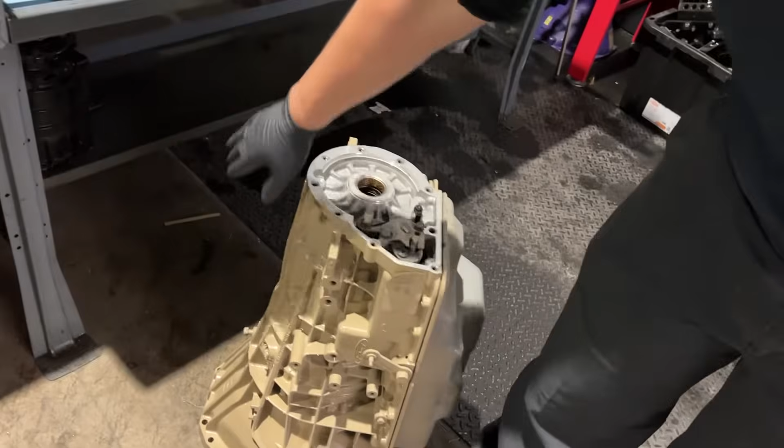So we're back at work. We're going to do some work today. We're back on the 6.0 project. We're going to go through and rebuild this transmission. I already got it torn down. As you guys can see, got the case cleaned up, got it painted, looking nice, matched the desert tan that we did on the motor.

But yeah, the first thing we're gonna do is we're gonna go ahead and get all these parts put in the parts washer. And guys, like I said, I already got it all torn down. Let me tell you guys, the best investment I think for this shop that I've made is this parts cleaner that I built, this little Christmas tree thing to hold all these parts.

Excuse the noise, we got Trevor over here working on a 6.0.

But yeah, guys, if you don't have one of those cleaners, I implore you to get one. They are literally the best investment. I think I paid 800 bucks for that thing off Facebook Marketplace like 4 years ago. So anyways, guys, first things first, we're gonna get all this in the parts washer, and then we'll come back and I'll show you the parts we're gonna use, and we'll get started.

So as you guys can see, this parts washer with this tree, I got everything to fit in here. So we'll just throw it in here for about 30 minutes to an hour, and these parts will pretty much come out looking brand new. So again, great investment, probably one of the best tools that I have purchased for the shop. Just that easy, and walk away.

All right, guys, got a little bit of liquid motivation here in a can.

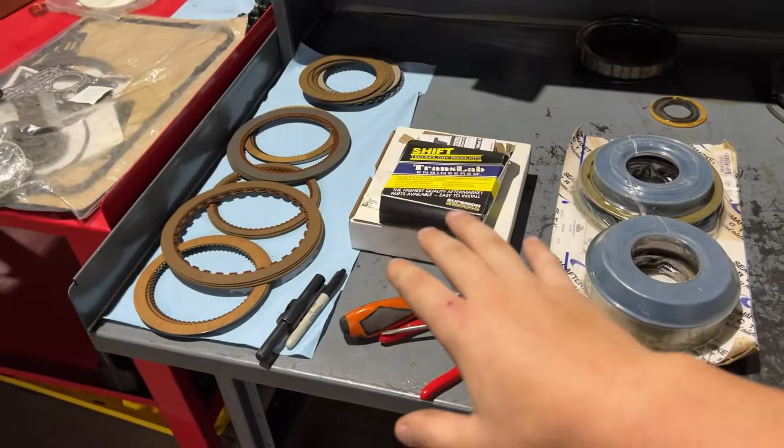Anyway, so here's the parts we're going to be working with on this transmission build. First off, if you guys remember, we did a transmission build before, a 5R110 on the channel. On that one, it was more of a performance build. So we did like GPZ clutches, billet input shaft, billet triple disc converter, the whole nine. This one, we're going for just more of a tow rig, nothing too crazy.

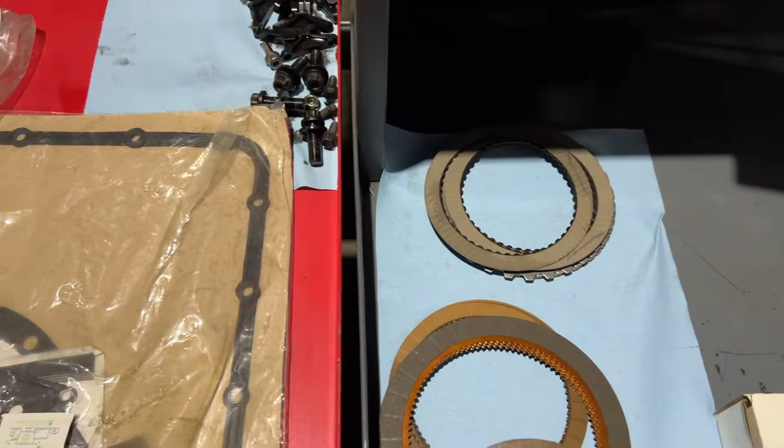So what we have here is an OEM clutch kit, Exedy clutch kit. All the steels really looked phenomenal on this transmission. So what we're gonna do is just kind of scuff them up, clean them back up, reuse them, save a few dollars there. But I did go ahead and purchase some GPZs for the directs, which are the clutches that are on in, I believe 3rd and 5th. I'll double check that. I may be thinking of Allison, but I'll double check that, and I'll let you guys know.

But anyway, those clutches, the directs, if you guys know anything about Fords and 5R110s, these are the most worn clutches. These are the ones that wear out the most. They're the hardest used ones in the transmission, arguably. So spent a couple extra dollars and got the GPZs for that. But anyway, like I said, the teardown, all the clutches that were in here actually didn't look half bad. So this trans was living a pretty healthy life. So I'm not worried about the OEM rebuild.

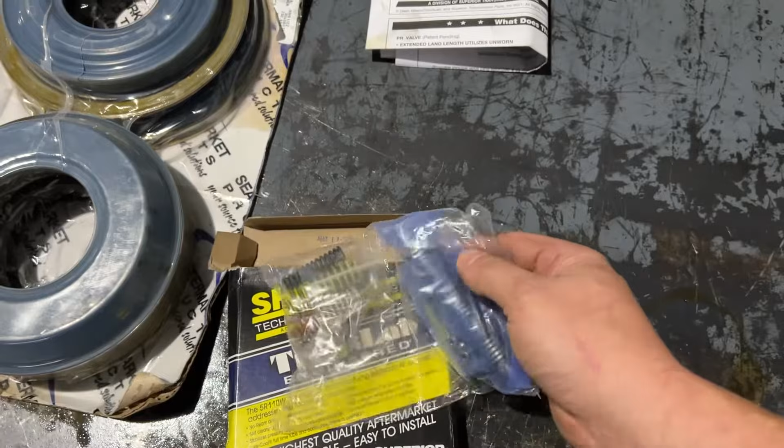But we are going to do some upgrades as far as the pump. I went ahead and got both the Superior kits for the 5R110. This one here is the pressure upgrade and the lube modifications that you want to do for these transmissions. We'll go over those as we get into them.

This kit here comes with some upgrades. Comes with a shim in here for tightening up the end play. Comes with a new direct bushing, an upgraded low reverse snap ring, and I forget what this snap ring is, some of this other stuff. Again, we'll get into it as we tear into it.

Superior makes a very well put together instruction sheet on their stuff, which is really nice. With a lot of things nowadays, nobody wants to put instructions on anything anymore.

But then, of course, we got a new set of pistons, bonded pistons. Now, these are the performance ones. They weren't a huge upgrade in cost. I think it was like 10-20 bucks more from just the regular OEM ones, so I went ahead and got them anyway. These are the same ones that we used on Gabriel's 5R, so I got no problem with them. I'm gonna go ahead and use them again.

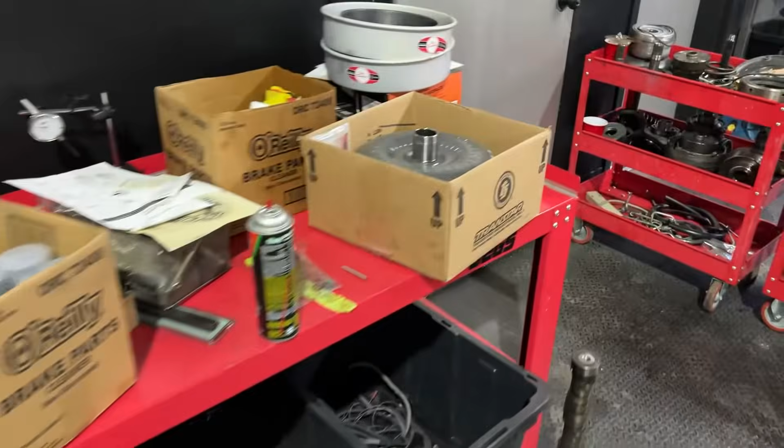And then over here we got the torque converter. My buddy Jesus over at TCR here in Vegas went ahead and rebuilt it. Stock cover, no billet cover, nothing like that. Again, because this transmission is going behind this truck, that's stock turbo, stock injectors, no tune. I intend this thing to just be like a good towing vehicle. You know, we're not going for a race truck. We got plenty of those. So the next owner, if they want to do whatever, that's on them, but at least we have a good foundation to start with.

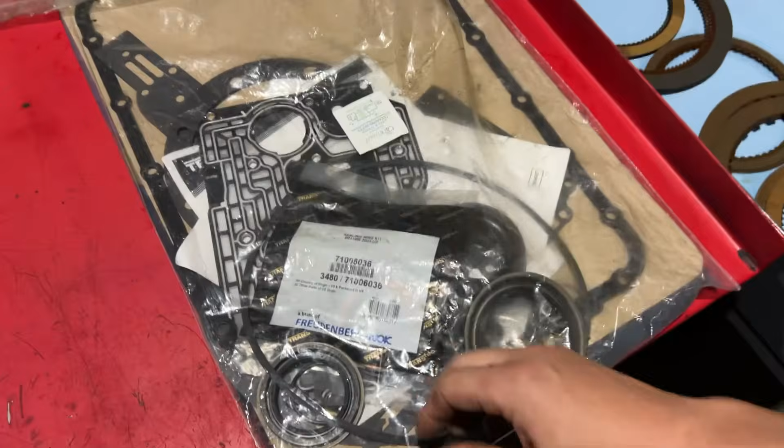And of course too, we have a full seal and gasket kit. Just a, what is it, TranStar, I believe. Of course, we're going to replace all the gaskets in here. I got the valve body, which is actually out of Gabriel's transmission, that we got to get cleaned up and reused for this.

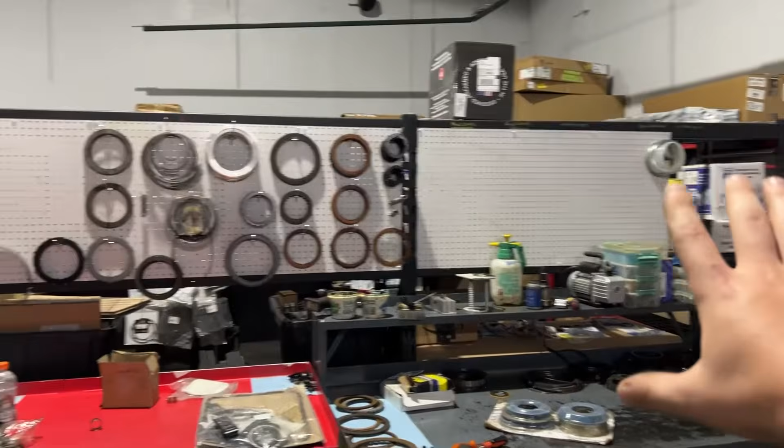And guys, real quick, I apologize if the lighting's kind of weird. I haven't had time to fully set up my room here. I only got the one light here, and we got the lights here, but I think what I'll do is get a couple more of these, add like 2-3 of them along here, maybe one here. You guys can see I started setting up some of my room. I got my pegboard. I just basically did some self tappers on the back of the shelves here that divide my room and the parts room. So slowly but surely we're getting everything kind of together. Moving a whole business like this and a whole shop, especially on such short notice, takes time.

So anyway, guys, we're just waiting on the parts to clean up. I'm gonna clean up a couple of these parts here, like I said, the steels and stuff, and we'll come back once we're going into assembly.

Now, when you're checking your steels to see if they're reusable, there's a couple things you're looking for. Main thing is you're looking to make sure that it's straight, right? I know it's kind of hard to see, but when you get a lot of heat put into them, they can kind of distort, and they'll get wavy. They'll actually look like this one here, which is supposed to look like this, but your steels are not supposed to look like that. So you're looking for that.

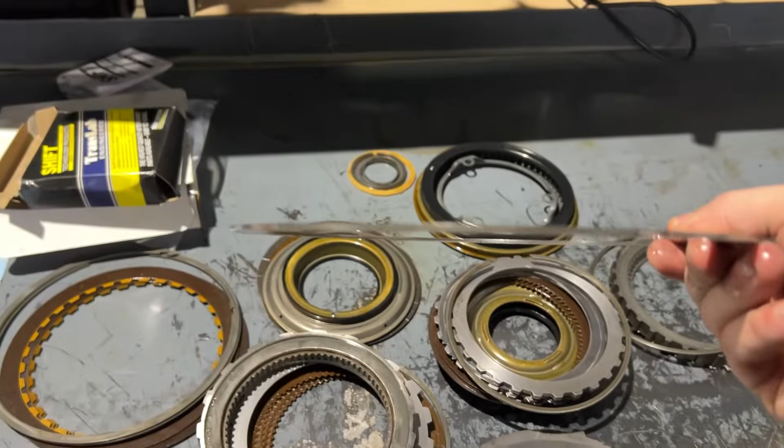You also want to make sure that your steels are flat all around, meaning like in the center here. Sometimes with the way the piston is, it'll push and you'll get like a cone effect going on with your steels and clutches. So you want to make sure that they're perfectly flat. That's the main thing with that.

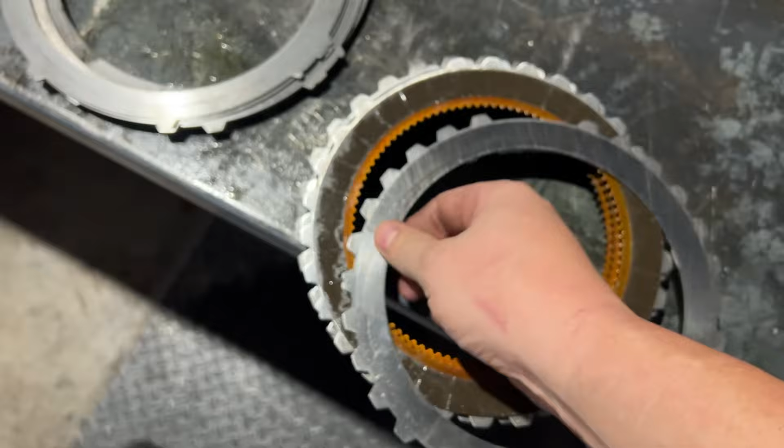And then as far as cleaning them up, all I'm using is a Scotch-Brite pad, and you guys can kind of see how this one is shiny, and then this one I just kind of scuffed up and dulled out a little bit. We're not trying to take off material, we're not doing any crazy machining, just kind of break down this shiny surface so that way the new clutches have a bit of a rougher surface to bite on. Something like this, where you guys can see it's more of a rougher machine finish instead of almost a polished finish after 200-something thousand miles of use.

But that's what I'm doing here, guys. That's a super simple thing. Good way to cut down costs on a budget build such as this one.

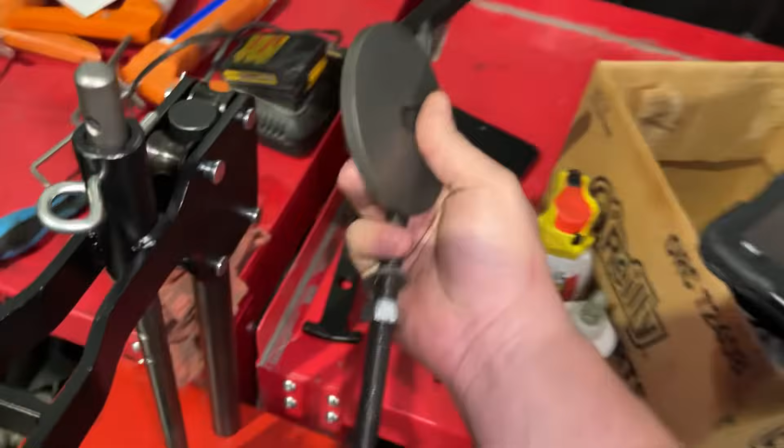All right, so while we wait on the rest of the parts to clean up, we're going to get the low reverse piston out. It is actually inside the transmission case. It's the only one. And to do that, we are gonna use our trusty $30 Amazon special piston chingadera, whatever you wanna call it.

And sorry about that noise, guys. And basically what we're gonna do is, all right, let's not drop the phone. Basically you got these arms. Of course, it's always weird doing stuff one-handed. Sorry, guys.

Come on. Woo! Get it.

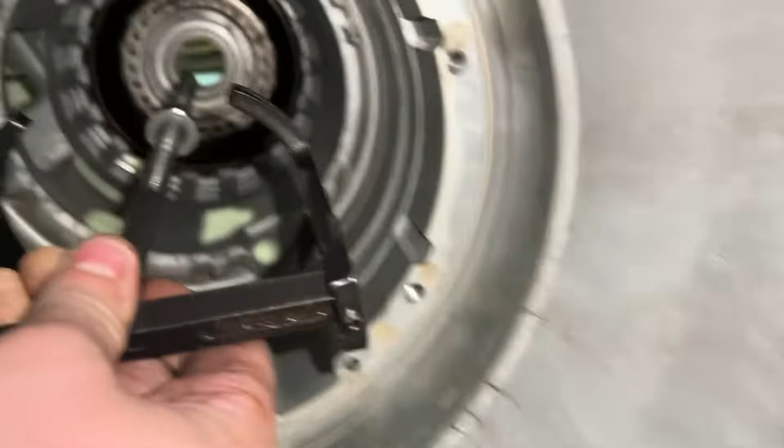Right. And what's cool about this tool versus the floor press is obviously I can't get the transmission on the floor press to make that happen. So this little tool just shoved down there. And on the other side, we got this piece that'll go here, right? Tighten it down and then push down on the spring like a regular press. Get the snap ring out, pull it out. And then of course we have the new one that we're gonna slam in.

Yes, sir. Huh? The low reverse piston.

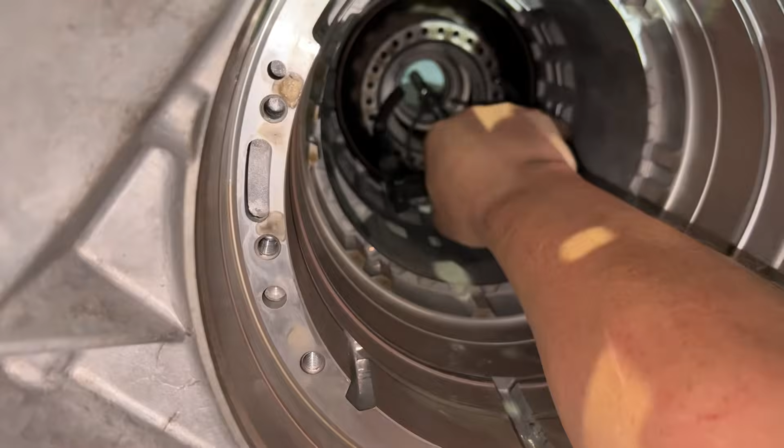All right, you guys seen, needed a little help, had to switch up the tools a little bit, but we got her done. Focus up. So, typical spring, and then I'm gonna come out. Gotta get some pliers. Cool. Now out with the old,

in with the new. So we're gonna go ahead, clean up down in there, just wipe it all, make it nice and clean, put some goop on, goop it up, and do the opposite of taking it out, putting it back in. Again, guys, much easier if you have the actual stand to hold the transmission vertical and whatnot, but hey, we're just getting her done anyway.

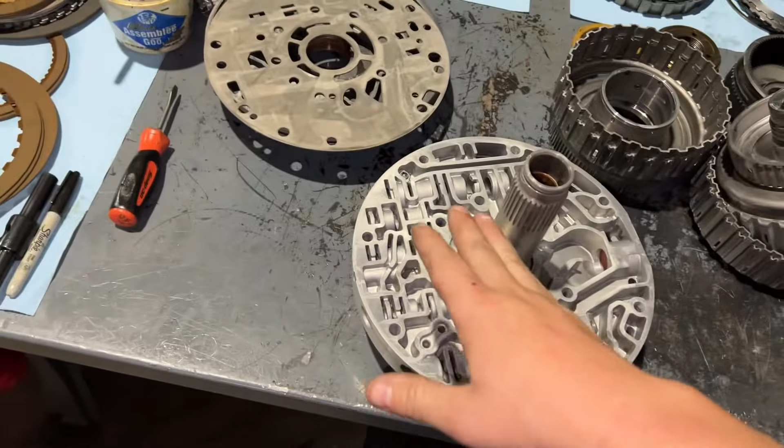So we got everything out, washed up, all the drums, everything like that. Now this is what I normally do before cleaning everything up, but figured it'd just be easier to do it now to show you guys. But what you want to do is there's a few things you're going to check on the hard parts. Generally, the hard parts are going to be fine, but obviously, if you have a failure, you want to look around, find out where you had the failure.

Now, on the 5R110s especially, one of the major issues they have is there's not enough grounding from the transmission to the battery, and what'll happen is it's basically trying to find ground, and apparently the way it finds ground, especially on these, is through the pump gears. And what'll happen is the pump gears will actually weld to the stator plate here.

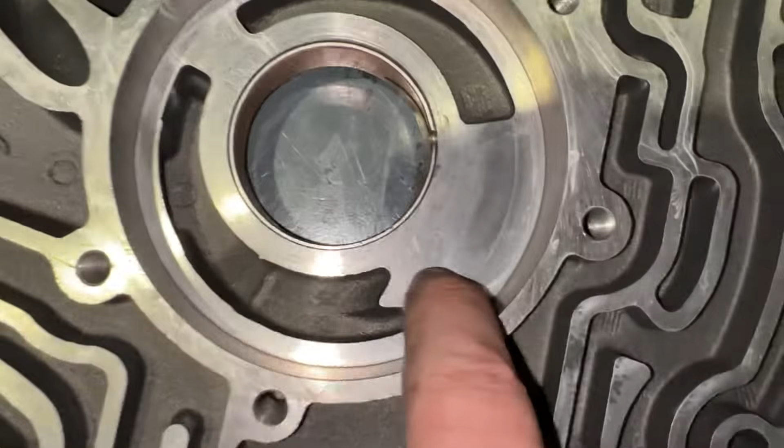So you want to look, this is where the pump gears ride. Look for any sort of wear on this. See how there, you can see where it's wearing, but it's nothing that's catching your fingertips, right? So that's good to go. Same thing, you just want to look around here, but mainly you want to look in here, and you can see there's just a little bit of scuffing, but nothing that's catching your finger, nothing crazy. So that pump cavity is good to go.

Check the pump gears out too. They're still in the wash. I dropped them, so I gotta wash them again. And then on the 5R110s especially, like any transmission, you want to check your stator bushing here and make sure there's no major wear. There's a little bit of a dark spot here, but you don't want to see any huge dark spots, especially on the stator bushing. This is where the converter rides. So basically the converter goes in like this, and this is where this rides.

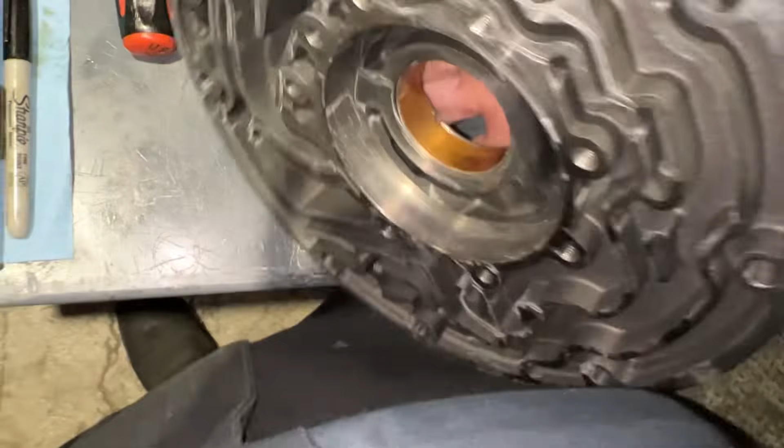So one issue you can have is an out of whack converter, right? Maybe a poorly built converter, or you could have a failed flex plate, something like that. Basically something that could put an excessive side load or stress on this bushing and wear it out. Sometimes you'll see it'll actually push it out and pancake it a bit.

Now, the issue on the 5R110s is that this bushing is not serviceable, at least without some special tooling. Basically, this bushing, it's kind of hard to see, but they press it in and then they finish hone it, because this hole, I guess, is not perfectly centered. I don't know, Ford, the way they do things is weird, but basically if this bushing's bad, you're just gonna wanna go ahead and replace this whole stator housing. You can't just service the bushing like you can on a 4R70, a 6R80, whatever else, like a normal transmission.

But anyway, guys, also on this transmission, like any transmission, you want to check all your bushings. All your drums are going to have bushings. Now on this unit, again, because we're on a little bit of a budget, I chose not to replace all the bushings.

So the only bushing we are replacing for sure is the direct bushing. This is the direct drum, and that's going to be with this Superior one-piece bushing with the special coating and all that, yada yada. We'll get to that here in a minute. But otherwise, all the bushings are fine. And again, it's the same thing as that bushing. You're just looking for any sort of pancaking, any sort of scratches or gouges, things like that.

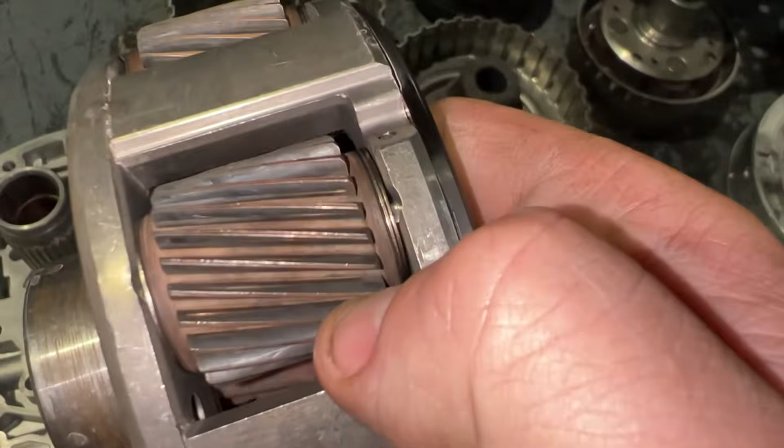Moving on, your gears, you're gonna look for any sort of major pitting. See how there's a little bit of light pitting there, but nothing super crazy. You don't want to see any pitting down in the valley there. And just make sure it spins freely. Kind of check your end play here. If you look in the ATSG book, which you better have if you're going to be building transmissions, and each book is specific to each transmission, there's going to be a spec for how much end play should be in all these gears, so you want to check that out.

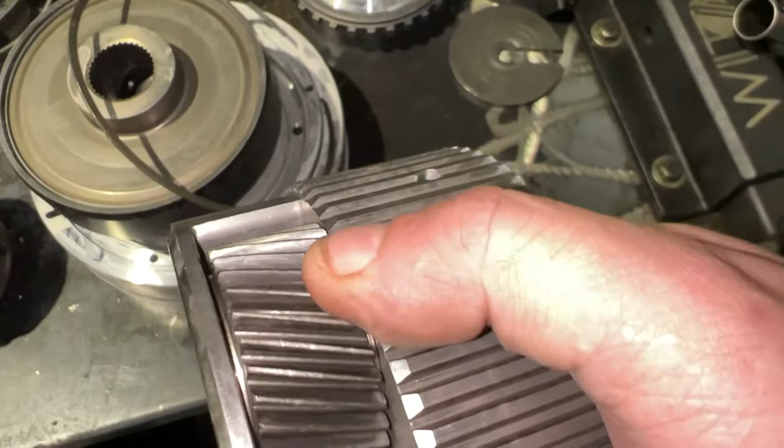Again, guys, I already went through this. This one, you know, not looking the best in the West, right? You can see a little bit of pitting on some of these gears, just starting basically. But being that this one is a stock power unit, I'm not too worried. If we were building a big horsepower unit, maybe we would replace those gears, swap them out for a unit like this. But otherwise, I'm not too worried.

So again, guys, you're just kind of looking at things like that. Same thing on these gears. Look for any sort of obviously bent gears, chipped gears, things like that, but pitting's going to be more likely. And then your play, because the bearings in here are non-serviceable. So anyway, like I said, we went through that already. Now I think we're going to start with the pump. We'll get the pump put together and get it off to the side, just because there's a whole bunch of pieces that we can put together and get it out of the way.

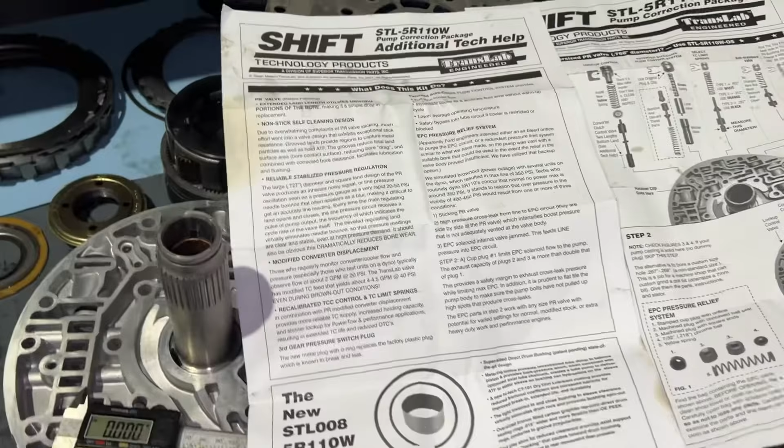All right, so the Superior pump kit covers a few major things. One of the biggest things for me, at least, and especially anybody running these transmissions in a hotter climate, is the full-time cooler flow modification. Basically, these pumps stock, they don't let fluid out into the cooler until a certain temperature. And here, when you're running these in a hot temperature, you're running them towing, Vegas, it gets up to 115 degrees in the summertime.

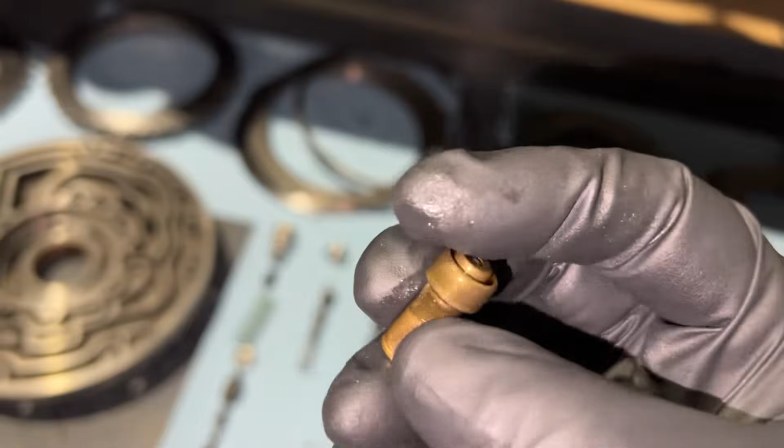We don't want that. So one thing we're doing is we're replacing the OEM setup, where basically this is a thermostat kind of deal, from what I understand. Replacing that with just their pieces here. You guys can see we're gonna get rid of all this crap and put their crap in. But yeah, that's one of the major things that we're doing.

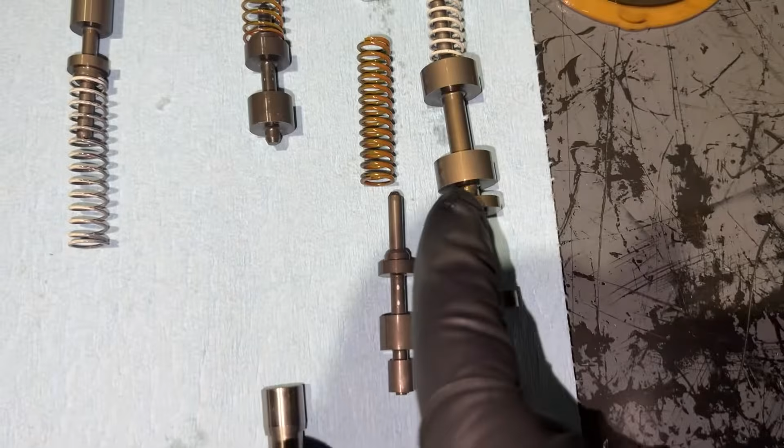Other than that, you can see here, this is the new pressure regulating valve. Here's the old one. One of the issues that's common in here, these like to seize up and stick. You'll get variable pressures where you have too high a pressure, too low a pressure, things like that. Not good. This one has kind of got a ribbing going, and of course it's got a special polish or coating, and it's like a super machine fit. But these ribs, even if some trash gets in here, the idea is that it'll go into the valleys and still allow this valve to move around, because you don't want too high of a pressure when you don't want it, and vice versa, too low.

Other than that, it's going to modify some of your converter lockup deal. Basically just upping the pressures for the converter, changing when it locks up, things like that. But anyway, this is all the old stuff I got laid out, and we're gonna replace some of it with the new stuff that comes in here.

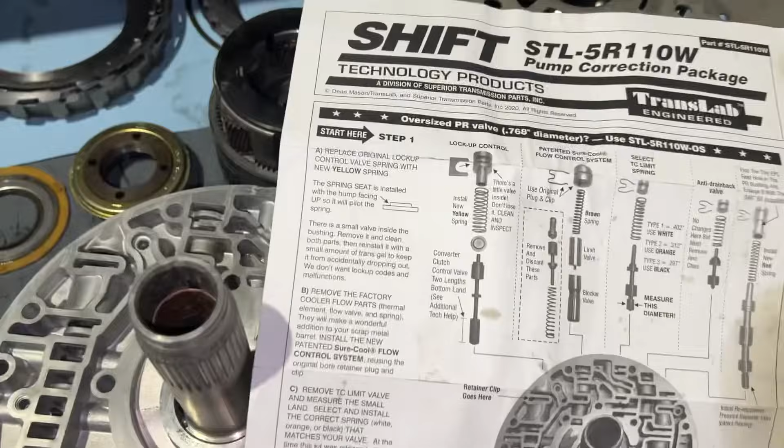So one of the first things we're gonna do, super easy, is in the lockup control, we're gonna just replace the green spring here with their new yellow spring. So we get rid of that, put that there. One thing to note is this valve, or this plug, whatever you wanna call it, at the end, has this little valve in it. It goes in here. Come on, focus up. Make sure that stays in there.

Easy to lose. I almost just dropped it and lost it myself.

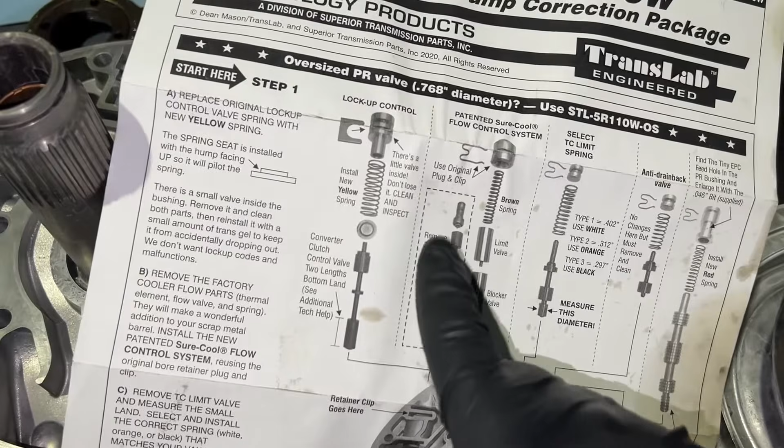Now moving on, we'll go ahead and start with the flow control setup. And as I was saying, this whole deal here, basically they're saying you're gonna get rid of all the spring, the valve, and this little thermal element thing. So we'll go ahead and do that. Let's put that over there for now.

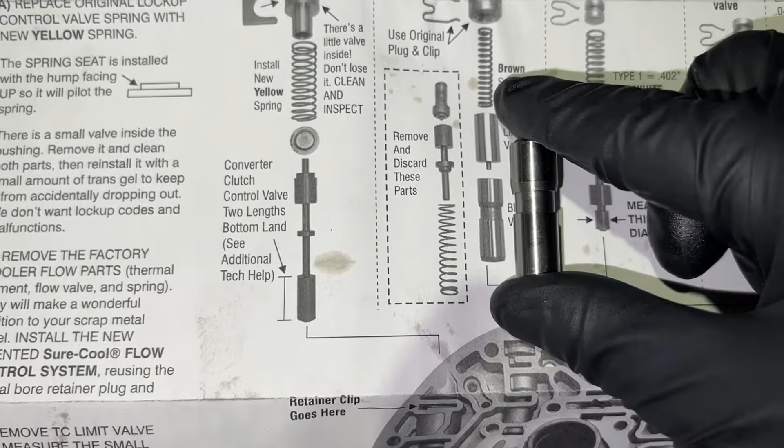And we're gonna replace it with the brown spring, the limit valve, and the blocker valve here, which is basically this deal here. This is gonna go, again guys, the instructions are phenomenal, just kind of follow them, super easy. Match up orientation, put that there. Then we're gonna look for the brown spring. That looks pretty brown to me. And that fits nicely in there.

Come on, focus up. Get your life together.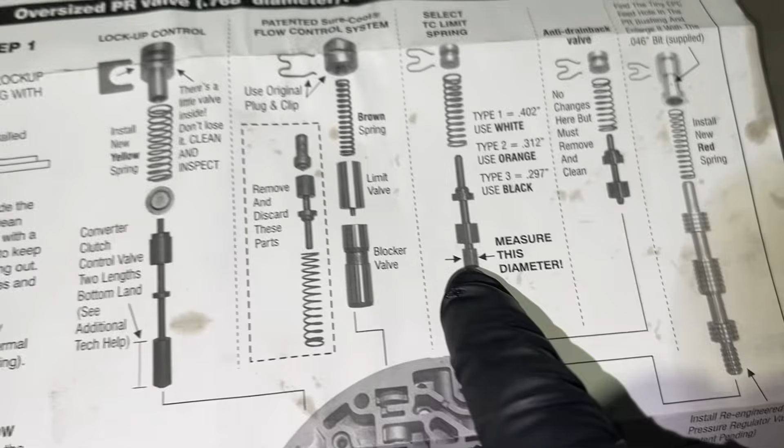Cool. That's done. Now we can play around with the converter valve. Now you can see here, there's actually 3 different springs that come in this kit for the converter valve. We got a white, orange, and black. And what they want you to do is measure this part, and there's 3 different sizes: 402 thou, 312 thou, and 297. So get your handy dandy measuring device.

Come on, can I do this? So we got the 297 thou, which means we're gonna use the black spring. So we're gonna use this one here. All right, we'll put that. And now that's done. Anti-drain back, basically leave that alone. That stays the same. Now we'll move on to the pressure regulating.

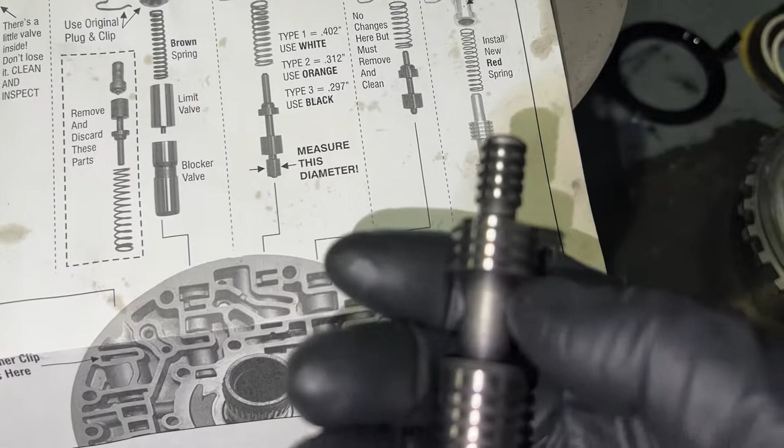This one, again, pretty easy. We're gonna replace the spring with the red one that comes in the kit, definitely that one. We can go ahead and ditch this whole deal here. That'll go there. And then obviously, pretty simple, the ribbed end. See, there's 2 ends, there's a smooth and the ribbed. Ribbed is gonna go into the stator.

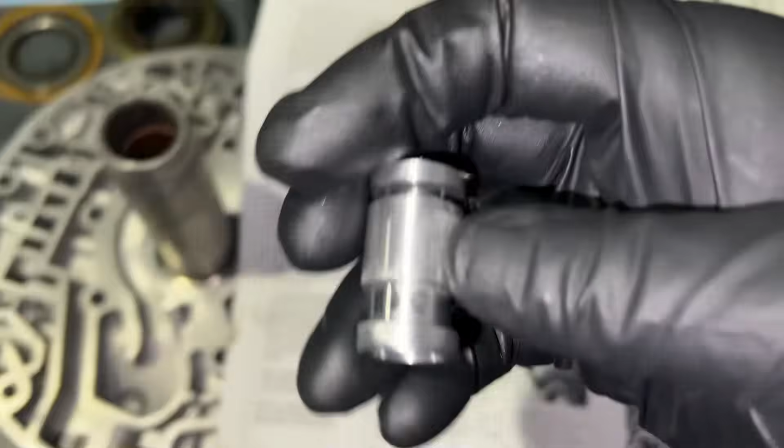And then the only other thing we got to do is there's a drill bit. We're going to go ahead and drill out the little lube orifice here. Where can you see it? So pretty simple, little drill, little hole, make hole larger, boom, that's done. So I'll do that off camera here in a minute.

And then moving on, we have the little plugs that we're going to replace here. So some stators are actually different, especially for different years. I think it shows it in the other sheet, but this one we're gonna go ahead and follow the instructions because we have this hole here and we have this little ball and seat deal here.

Basically the whole idea here is to open this up, clean it out, make sure there's no trash in there, and replace it with the new stuff. And then this hole here we're gonna go ahead and block off with this plug. So I'm gonna go ahead and get that knocked out and come back here shortly.

We got the pump case put together, the pump half, stator housing, whatever you wanna call it, all put together with all the new Superior upgrades. We got our EPC plug here. We got the other plug they provide here. And then of course all the new valves, new springs.

Now, time to assemble. One thing to note with the gears, you got the pump gears here. See how there's a flat side, and then there's this side with the bevel, and then the beveled pump gear that goes onto the converter. You want to make sure that's facing out on the pump. That way when you go to slip the converter in, you're gonna have a bad time if you're trying to do it here. This way, this will kind of guide the converter in.

And then of course you got a dot here and then a dot on this side. So just kind of keep those two together. We'll put them together like this, and then they'll go in dot facing up. Obviously what we're gonna do is lube this up with some green trans gel. That way when it fires up, it is ready to go. We'll put some lube on the bushing too.

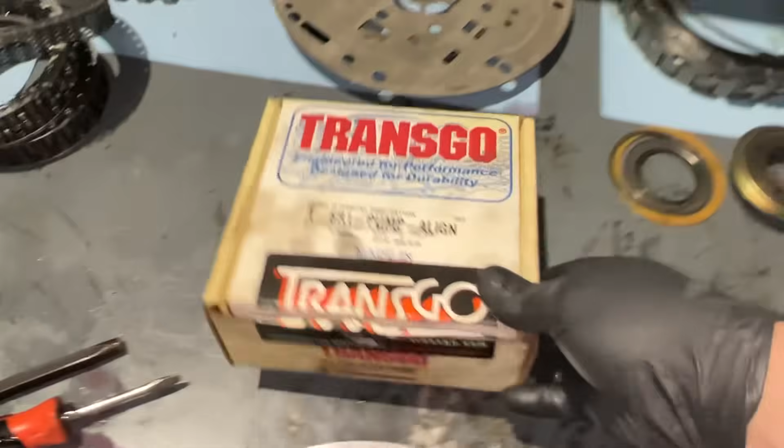Here is where you're gonna need a special tool. So it's this tool here, a pump alignment tool from Transgo. And I believe it comes with this. Either that or you need this. It's a pump tool. You guys will see how it goes together once we get into it.

But right now, real quick, I'm just gonna go ahead and lube up these gears, get them stuffed in here. Again, the reason why you lube them up is, one, you don't want metal on metal dry. Two, the trans gel will help act as a suction to get the pump going, so that way it'll get fluid coming in quick. I'm gonna go ahead and do that, and then I'll get you set up on the tripod, and we'll get this pump half put together.

All right, so for the alignment tool, basically you got these two bushings. They're just for different size stator bushings here. And then you got these two little roll pins, and then the clamp that'll go around the outside.

So basically we got the pump in, a little bit of trans gel on it, and now we'll get our stator plate put on, kind of line it up with these holes, and then we'll go ahead, kind of hold it, flip it over, do this number, then again do the same here. Where are those three holes at? Get it lined up here.

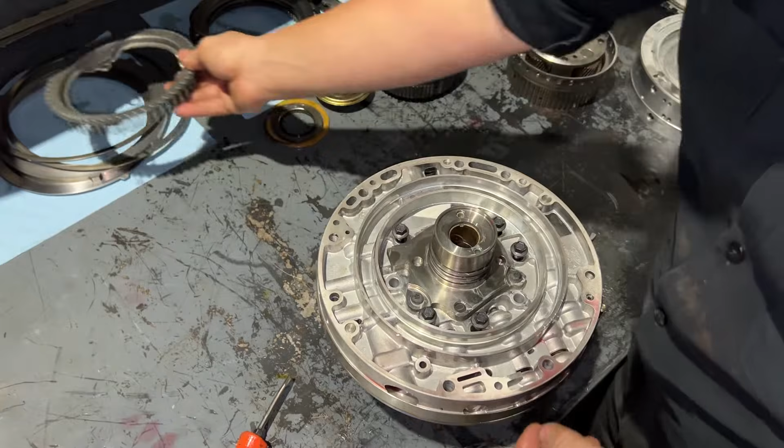All right, so these 10mm bolts will get torqued down to 23 foot-pounds. Do it in a star pattern, of course. Now we can go ahead and take out our alignment tools. Start with the clamp. Come on. There we go. Come on.

And now we'll just install our front seal, our piston, and our apply spring or our return spring, and the pump will be done. Quick tip about any sort of seals like these, see how they have that spring in there and you got to pound them in. I always like to take a little bit of trans gel goop, put a little behind there like that, just so that way when you're pounding it in... it's rare, but I've had it happen where you pound it in, that spring pops out, and now you lost your tension of the seal.

So a little bit of trans gel, pack it in there. We'll fix that, no problem. You guys can see I got the overdrive piston and the return spring installed. This little, I don't know what it's called, spacer or shim or bushing, bearing, whatever, installed. And then of course our coast clutch seals are all installed. Again, same thing, the scarf cut, you can see how they still want to come out. I'll apply a little more before it's time for assembly and I stab everything in.

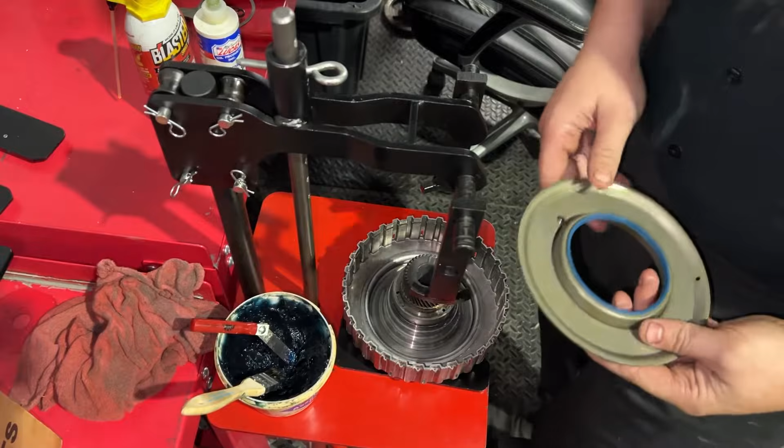Then of course coast clutch bearing. Pump assembly is all done. Now we can move on to the drums. All right, so I'll show you guys how to put in the apply piston on the coast clutch hub, and then it's pretty much the same for all the other drums, with the exception of I believe the forward and the directs. They have two pistons with a spring in the middle, so you just got to keep an eye out for that. But otherwise, this foot bench works great.

That other tool that I showed you with the low reverse spring works just as great too. This is just a little easier because you don't have to hold it and everything like that. But if you're only doing 1 or 2 transmissions every once in a while and you don't want to spend $400 or $500 on this tool, that little $30 Amazon tool works just great for what it does. So a little bit of lube on the piston, a little bit of lube in the drum. Of course there's a limit, but for the most part, lube is your friend when assembling transmission.

Just kind of walk it in, get it seated in there. Boom, good to go. Now we have our return spring, goes like that. Now we just set up the tool.

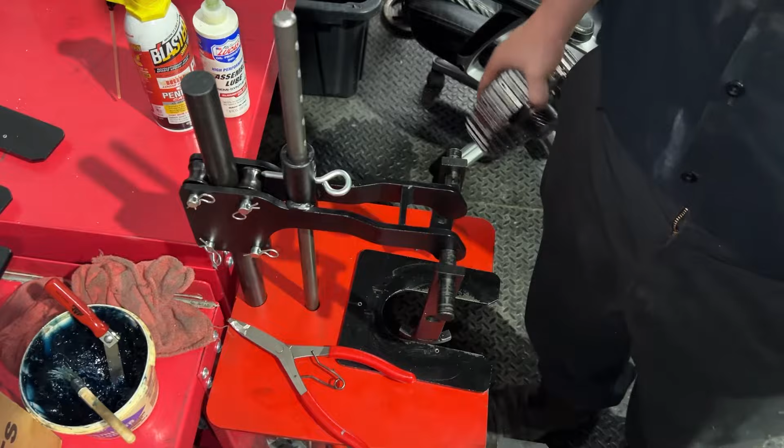All right. Then just center up the spring. Hold it down. Then we can put in our snap ring. Make sure it's seated all the way around, of course. Let off. We're good to go, ready to start stacking clutches. I'll do the same thing for the other drums, and then we'll get to stacking clutches.

Woo! Look at that, boys. Been a few days. Our new landlord put in our new lights. So now, it's not so depressing in here.

Anyways, guys, we're gonna get back to work on the 5R right now. We got all of our drums pretty much ready to go. Our coast clutch drum, our forward drum, direct drum. I got all the clutches stacked up with the steels and snap rings and everything. The only thing I still gotta do is I got the direct bushing in the freezer to hopefully help it install better.

And I actually found out this Cummins front seal installer that we have, you guys have probably seen me use it on the Cummins timing housings, it actually fits pretty well. See if you guys can see, pretty decent. So hopefully it'll work. It's just a little bit of help. We'll go out to the press and press that in.

But anyway, what I'm gonna do is I'm gonna stack up one of these drums. I'll stack the forward drum right now. I'll show you guys how I do it. I do all my measurements, the initial stack up dry. We'll put everything in, stack it up, measure it out, see if we like it, if we gotta adjust anything, whatever we gotta do.

Then we'll put the clutches in the ATF. You guys can see I got the reverse planet and the forward planet in the ATF, just getting the bearings in there lubed up. But yeah, so let's go ahead and stack this up, and I'll show you this one, and then the rest are obviously rinse and repeat.

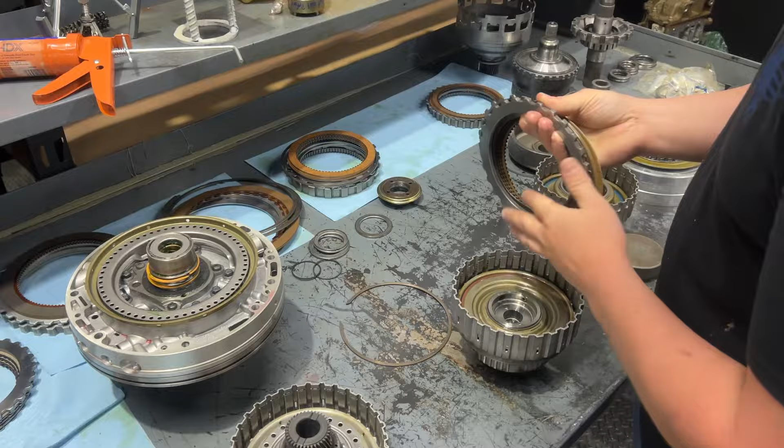So like I said, we got our forward clutches, we got our thick reaction plate, and then we got our wavy. So the wavy goes down first, followed by a solid steel, then clutch, steel, clutch, you get the point. And now, since this is a stock rebuild, we're only going back in with 4 clutches. On the performance rebuilds, I believe we add a clutch here with like the Raybestos GPZ or Alto.

And to check, all you need is a feeler gauge, and go from there. So I'm going to start with 39 thou. I believe spec is a bit higher. Go to 43.

What's up, Zeus? Chill out, buddy.

45. Getting a little tighter. You want to make sure you go all the way around. Make sure none of the clutches are kind of off center. 47. Try 49. Getting there. Go to 51. 51 seems to be the number. Call it 51, 52 thou right there.

Last thing we got to do for this drum is right here is where this little spacer that comes in the Superior update kit, this little metal spacer, pretty thin. That goes right here. And then your new bearing, which I don't think I showed, but every time I do a transmission build, I get new bearings. It's very cheap. Sonnax makes bearings pretty much for all these transmissions.

Hang on one second. So then you take a bearing, and that little spacer just sits right between the bearing and the drum, and good to go. Basically what this spacer is going to do is take up a bit of the end play. So these transmissions have quite a bit of slop, and the issue with that is, number one, your forward apply sealing surface, those O-rings, you're going to have movement in here, and it's going to shift around, and it could actually shift enough, as well as with the directs, which is more common.

You see, you really have just this little bit of space for these to seal on the center support here. So imagine if you have a few thou extra clearance, it can actually slip off and allow fluid to bleed past here, and that's a common issue with burning up the directs on this transmission. So quick, simple fix. And now we're gonna put these forward clutches in the ATF, and we'll move on, stack the rest of these drums, clearance them all out, get them all pre-lubed, then we can start stacking all this into the case.

All right, so we got all the drums stacked up. One thing I forgot to mention with the coast clutch, you have this diode here. So you can see it spins one way and doesn't spin the other way. So just make sure that's how it works. If it doesn't, gotta replace it.

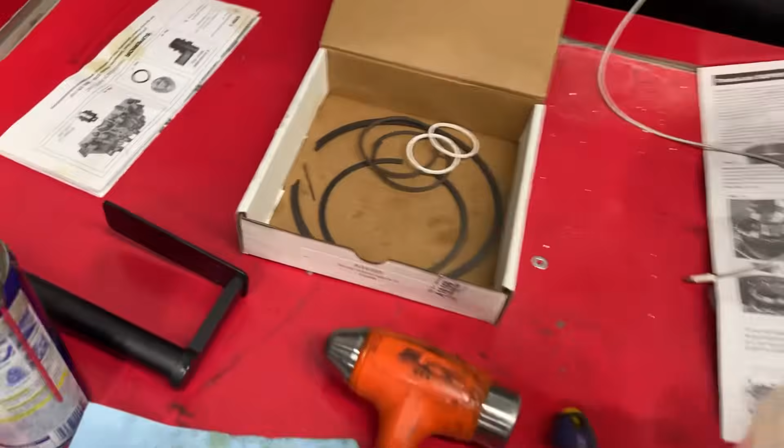But anyway, drums stacked. Now, the other thing that the Superior kit comes with is these high pressure sealing rings that go on the forward drum here. I'm not going to use them. Reason being is it requires a resizing tool. So basically you would stretch these rings on, and then they'll be stretched out. So you have this tool that goes over and will size them back to where they need to be. I don't have that tool, and since this is a lower power build, I'm not too worried about that. So I'll buy that tool in the future, but this build we're just going to use the OEM replacement seals.

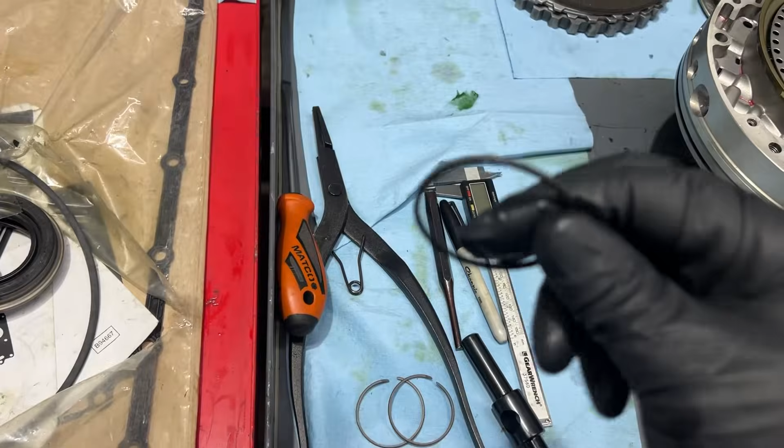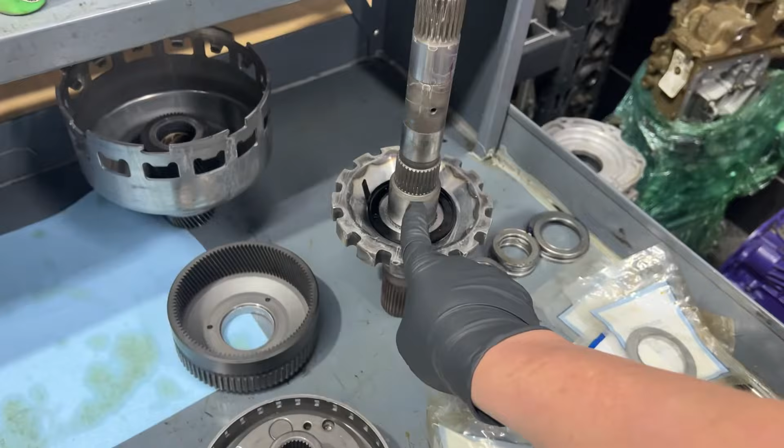So there's two seals here in your kit that are going to be kind of the same size. One's going to be a scarf cut style, and one's going to be like an interlocking ring. Like this. So the ones with the interlocking rings are what's going to go here. We're going to put those on, and a little bit of the green assembly goo, just like we did here. These scarf cut rings go down in the case. There's two seals here that seal the output shaft to the case and provide the lube to the rear section of the case. So make sure you guys install these.

And then the only other thing, this kit also comes with new fancy direct seals, and those go on the center support right here. So those are going to go there again with some green goop. And then we got our low reverse snap ring, so we can throw this one away.

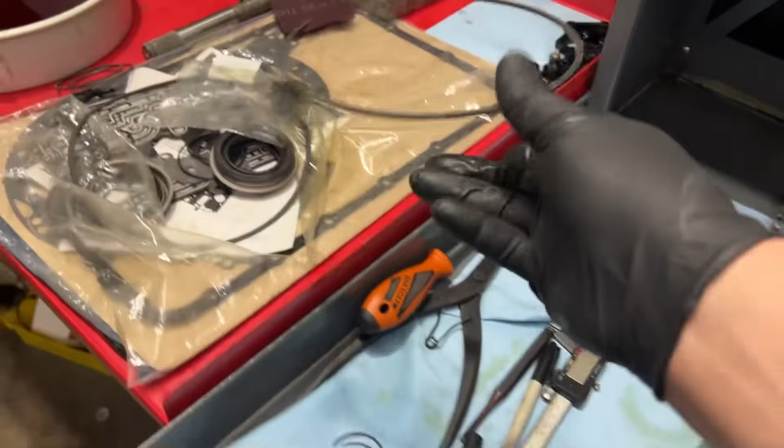And then last but not least, we got the new snap ring for the intermediate hub, which goes here. So gonna get all that installed, and then the next thing we're gonna start doing is, I got the case on the bench. We're gonna go ahead and take the reverse clutches. We're gonna stack them up, get our clearance.

All right, so to measure low reverse clearance, I'm gonna go down in between the diode and the clutch and just kind of measure it out. Again, you want to check this diode. It should only go one way and stop the other. So my gauges that I have here, I can really go to 74 thou, which is what I stacked up here. A little more clearance there, so I'm gonna guesstimate right around 80 thou. Spec for this clutch is 70 to 120 thou per the manual, so we're good to go. Move on to the next.

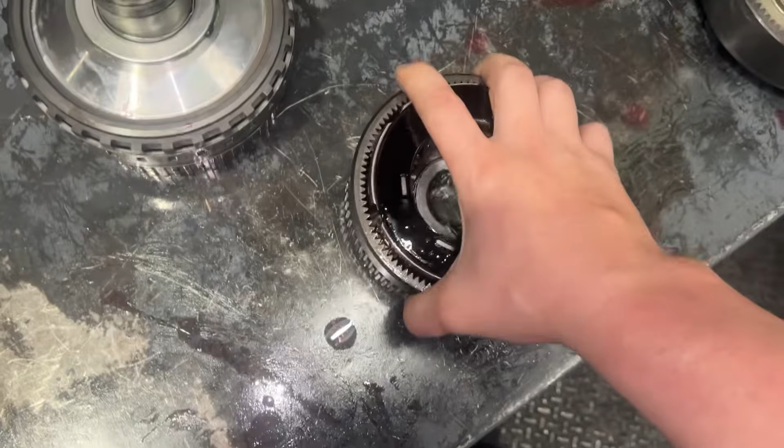So I started to assemble some of the sub assemblies, like this ring gear and gear set. We got our bearings in. Just make sure you get them in the right orientation. Again, guys, follow along with the ATSG book on this. I've referenced it a few times this build. What I like to do too is get some green assembly goo, and I put it on all the bushings, anywhere where there's just going to be metal on metal riding in the initial fire up kind of deal.

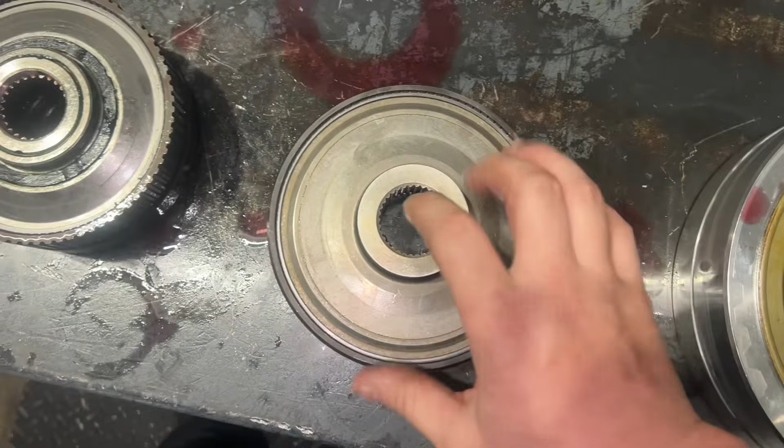Also, I haven't ever seen this, but this is your low reverse ring gear. This is the first thing you're going to put in the case. It goes down there. I guess on the early models they had this plate and it had holes in it. If you have that one, you want to replace it with a solid one. It's just much stronger. But again, we got all our bearings in, everything lubed up as far as our rings. All these plastic washers or seals, again, I put some green assembly goo on. And yeah, now we've just got the clutches soaking and we're going to start assembling.

And guys, don't forget, like I know I have before, those sealing rings, those scarf cut rings that go down in the case that are for the lube circuit. So we'll start stacking some stuff up. First thing to go in, it's gonna be this gear. Oh yeah, I forgot to mention, there's a bearing down in here. Make sure that bearing's good to go. Make sure it's there. Now we'll start stacking up the transmission.

Again, just make sure you got all your plastic rings. Your low reverse hub has 2 of these spacers. You can see I was soaking this in ATF for a little while just to help it out a little bit. Cool. Now the clutches are drying. We'll start stacking everything up. Last thing I got to do is get this direct bushing in, but I'll get that in and then I'll put you on a time lapse of just throwing everything in.

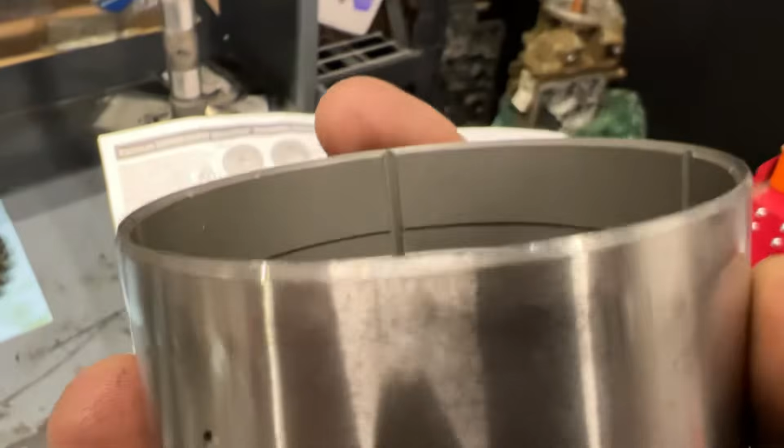All right, guys, don't be like me and mess up and put this bushing in wrong. It's a one-way bushing, so you can kind of see in this picture, there's a closed off end and there's an open end. So if you look at the bushing, you can see where this oiling groove goes all the way through, and then on the other side it stops. This only goes in one way, and it's with the oiling groove down. So it needs to go in like this, so it stops at the top.

Save yourself $98, because you have to buy the whole Superior kit all over again. And if it weren't for this bushing being such a crucial piece to the transmission build itself and it living, I wouldn't have bought it again. But I think this is probably one of the most important pieces of this update kit.

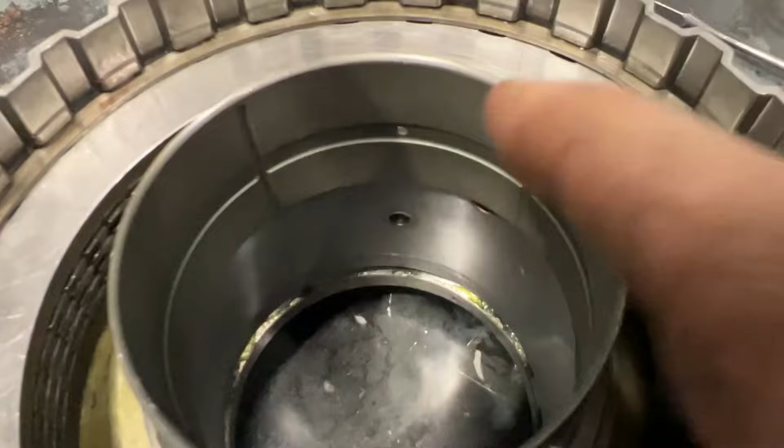So I'm gonna go ahead and get this new bushing in. Pretty simple. You just want to line up this hole to this hole. Again, you want to make sure the closed end of this oiling hole is at the top, and then you want to make sure you have enough recession, I guess you can say, in spec. So I'm gonna go ahead and get that done, and then we can get the rest of the transmission assembled.

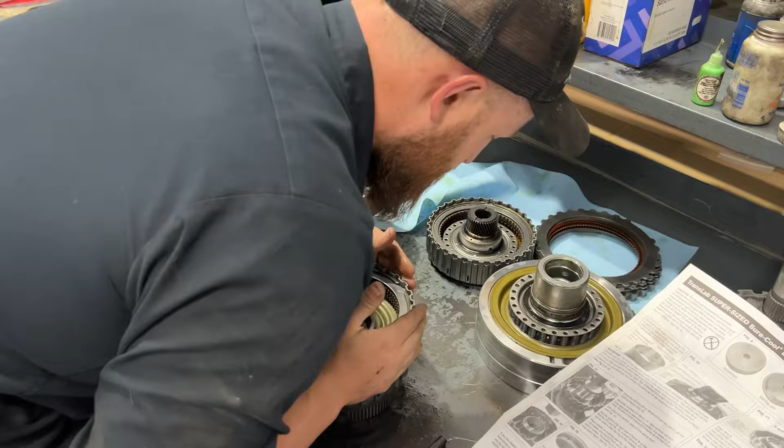All right, so now we need to assemble our forward, direct and sun shell. This goes all in as one big piece. So easiest way I've found to do it, you got your direct drum, your forward drum. Want to make sure your seals are all good, your bearings good, your little plastic washers good, and then kind of wiggle it in like that. Gets all the clutches aligned with the splines. And then you got your gear assembly. Again, you got your bearing in here with the spacer. You got your plastic washer lubed up.

And then you got a bearing in here. Then you take your sun shell. And there she goes. And you can see how the teeth of the sun shell just kind of go and engage these splines on the direct drum. That's how you know it's all the way in.

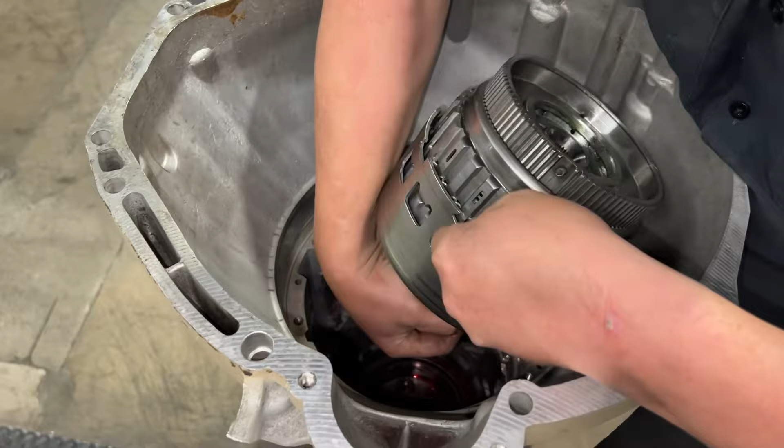Now we'll take this whole assembly and quite literally plop it in here. All right, now in all fairness, there's an actual tool that holds this whole assembly. It kind of locks in here. I don't have that tool and I don't plan to buy it. So I'm just gonna plop her in. Kind of how I do it. Make sure the bearing down in there is good to go. Get her as far in as I can. And just drop her in. Twist it in, lock it in, good to go.

Next, you got your intermediate clutches. So start off with your reaction plate and your 3 intermediate clutches. Followed by the center support. Now you just gotta make sure this opening here is indexed with the hole in the case, because that's where the speed sensor comes through. This snap ring here is tapered. Let's see if you can see. You want to make sure that the flat end goes down towards the center support.

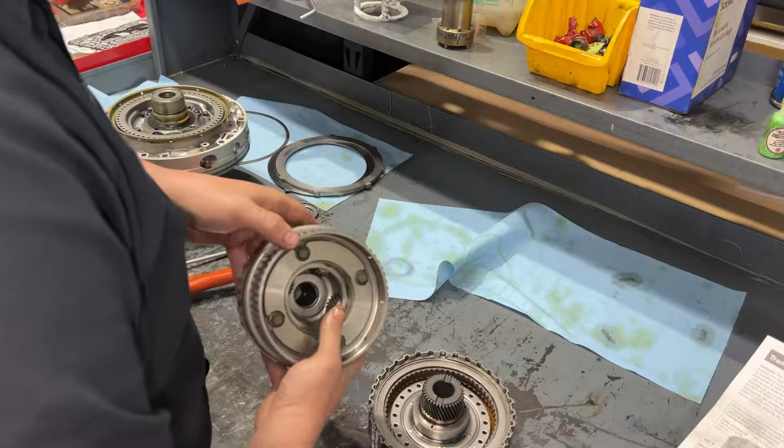Next up, we got our coast hub assembly and your intermediate shaft gear set assembly. What you want to be careful of is this bearing here. See how it kind of is offset and you can't take it out. What I like to do is I stand it up right like this, make sure the bearing's seated, and then put this drum on in the vertical like this. Make sure that bearing stays in. And then take this whole assembly, put it in the unit.

Now we take our overdrive snap ring and install it in the case. Then we'll take our overdrive reaction plate. Now on this plate there's these 2 marks here and not on the other side. Not quite sure what that means, but I'm gonna go ahead and just put the X up. Then of course our clutches.

And then last but not least, we're going to install our pump assembly. Of course, we got a nice fancy new gasket. Make sure it's installed correctly. Otherwise, you're not going to have a good time. Everything's cleaned up, ready to go. We got some lube on our outer seal here. Make sure your O-rings here are secure. And then you got your bearing here. I'm good to plop her in.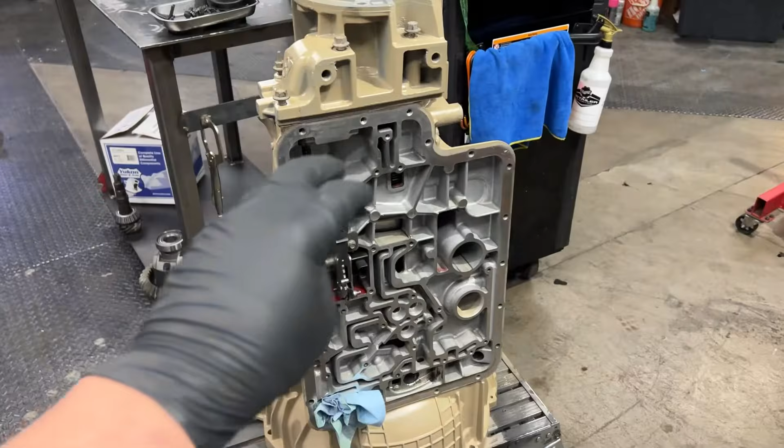All right, so we got the unit flipped over. Next thing we need to install are these 2 feed bolts that go to the center section here. You have 2 different ones. You have one with a bigger orifice and then one with a smaller orifice. So you can see it's kind of restricted, and it's a Torx bit. This one is going to go to the rearmost port on the housing. That's for your forward clutch apply. And then the bigger one with the bigger orifice, the hex head, goes in the front, and that's for your intermediate clutch. These get torqued down to 24 foot-pounds, and then we can go ahead and get our valve body installed. Before we install this valve body though, I want to go ahead and clean it up.

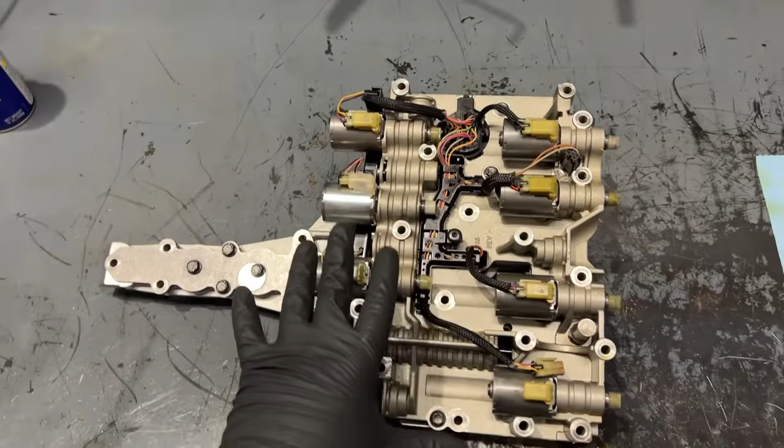This is actually a new Sonnax reman valve body, already with their updated manual valve and new solenoids, everything like that. This is actually out of Gabriel's transmission in his Excursion. We used this valve body that was in this transmission to test in his truck, see if it changed anything, and then we just never swapped it back. So anyway, generally I would say just get new solenoids or get a new valve body like this. Definitely get a new OEM harness every time. But since this is basically new, we're just gonna tear it apart and clean it up and kind of show you that process. Super easy.

You'll notice the thing about this valve body is, besides the manual shift valve, there's no other sort of hydraulic valves. It's all solenoid controlled, all electronically controlled. So kind of cool in a way, but also kind of a pain in the butt in a way.

So very susceptible to any sort of electrical gremlin or electrical issues, so definitely want to keep that in mind when working with these. One thing you do want to keep in mind when you're tearing these apart is that these solenoids are all different. They all go in a certain spot, they all work in a certain way, so you cannot mix and match these up. What I'm going to do is tear it apart and put the solenoids in the same orientation that they came out.

All we're going to do is just open it up, clean it up, put it back together, fresh gaskets, nothing crazy. We have fresh O-rings for the connector that goes through the case and connects to the body harness, and then we can slap this in the transmission and rock and roll.

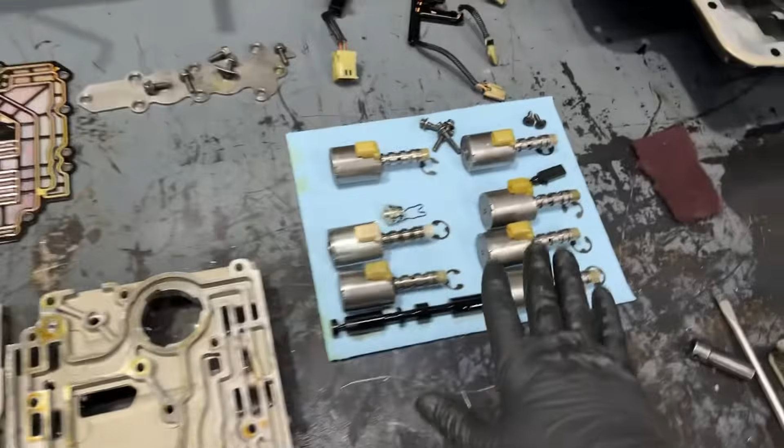All right, so in the interest of time, I just tore it down. As you guys can see, like I said, just keep everything organized. It's exactly how it comes out. All the solenoids here. We got the channel plates. Like I said, there's no extra valves in here or nothing. It's just all solenoids. You have a bonded gasket, then this plate here with a gasket.

So what we're gonna do is just throw this in the parts washer, get it all cleaned up. I'm just gonna brake clean all these solenoids. Now there is a way to test these if you are trying to reuse old ones. You can ohm these out or something like that. It's in the manual. But again, we're not gonna do that today because these are good.

One thing is this one here, you can see that it's got a white connector. This is actually an aftermarket higher pressure solenoid, and I don't think we're going to use this. I think I'm going to grab a stock one out of one of my other valve body cores, just because of the nature of this transmission. Seems very hit or miss. Some people swear by these, some people say don't use them.

We were trying it in this valve body that doesn't come with the Sonnax valve body, to see if it could fix some of the issues we were having on Gabe's transmission, but it didn't. So like I said, just because this is a stock build, more or less, I'm not going to use this. I don't have an opinion one way or another. I don't have enough experience to tell you, but that's just what we're going to do with this unit.

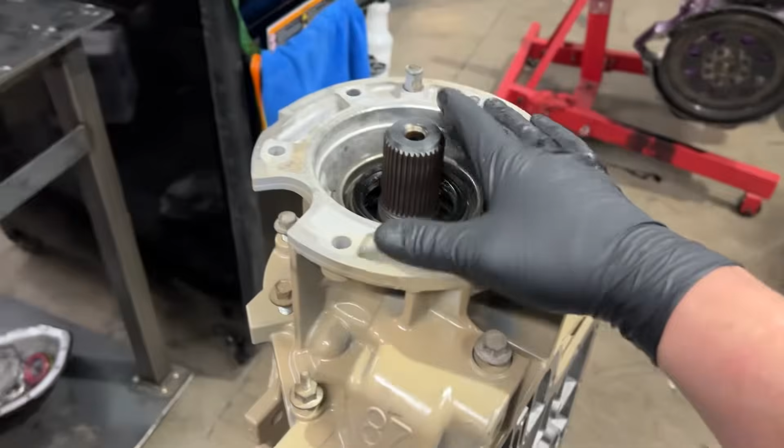So I'm going to get all this washed up, and in the meantime, we can tighten up this tail section, get the rear seal installed, and torque down the output shaft nut. All right, for this output shaft nut, one thing I do is clean this surface up with some Scotch-Brite. You can see I already did it. We got the seal installed. Now keep in mind there is an O-ring in here.

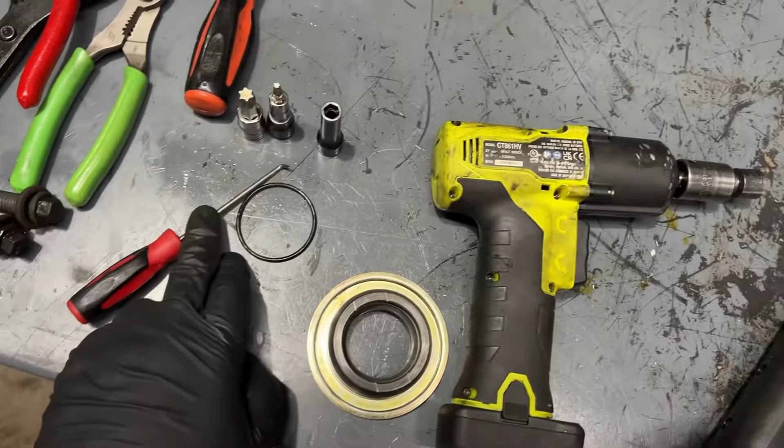In your rebuild kit, you're gonna have several O-rings, two that are similar size and one that's a little bit bigger. They're all kind of the same size, but there's two that are exactly the same size, and those are actually for your valve body harness. And then you got this one. So we're gonna go ahead and slam that in. See if I can do this with one hand. Come on. Make sure it's fully seated.

A little bit of trans gel never hurt no one. You don't want to put your seal in dry. You never want to stick it in dry. Always make sure it's lubed up. Then I'm gonna put a little bit of blue Loctite on here. You don't have to, it doesn't say that in the manual, but why not? And then this is one specialty tool you're gonna have to have.

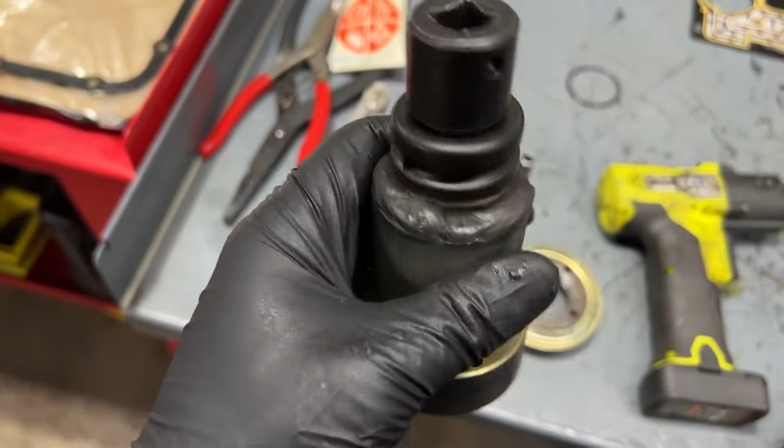As you guys can see too, we had to modify it. The original tool just kind of wallered out, so we welded another impact socket on here, and I got my adapter in there. So it's a fancy tool that you got to do. Oh, that was weird looking at the camera and doing that. Fancy tool. Put that down in there, thread it on, and torque to 148 foot-pounds.

So I'm gonna have to get Trevor in here to hold the case for me, torque it down, and then we'll move back onto the valve body. One thing I want to mention, that if it's a two-wheel drive unit, you're not gonna have that nut. You're just gonna have an output tail shaft, a little taller, and a longer shaft. So you don't have to worry about that part, but this is a four-wheel drive, so we gotta put this

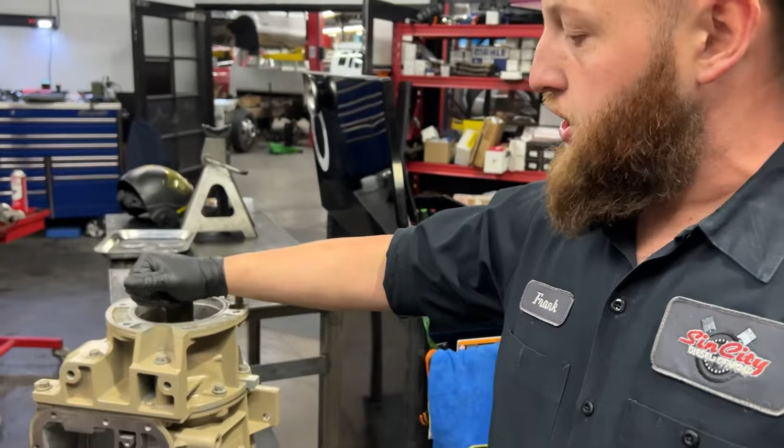nut on. Needed a little bit of help, had to bear hug the damn thing to get it torqued, but we got it done. One thing I forgot to mention, put the unit in park, otherwise you'll just be spinning. But yeah, so torque down to 148 foot-pounds. That's good to go. Last thing we got to do is get this valve body put together, buttoned up, get her installed, and get our filter put in, and then that's a wrap.

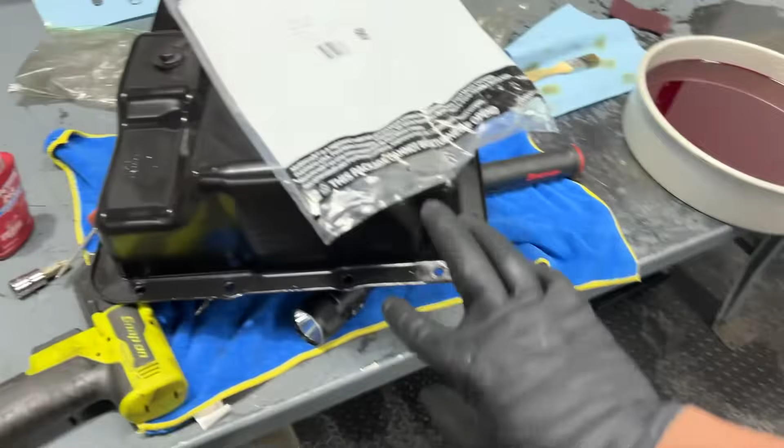Part number here. Now, if this is a performance unit, one thing you can do is upgrade. This is the 6.0 style filter. You can upgrade to the 6.4 style filter. You're gonna have to change out the pan to a 6.4 pan, and that is whether you're using like a Mag-Hytec or an aftermarket pan or a stock pan. The filters will not work. So if you're gonna do that, I recommend it on a performance unit, but just keep in mind you do have to swap out pans.

We're not doing that. We're keeping just a 6.0 filter. I decided to keep the aftermarket pressure solenoid just because we're not doing any tuning or nothing like that. So I think it'll help it live a better life. I don't know, we'll find out. Now, the last thing we got to do is install our pan and our gasket.

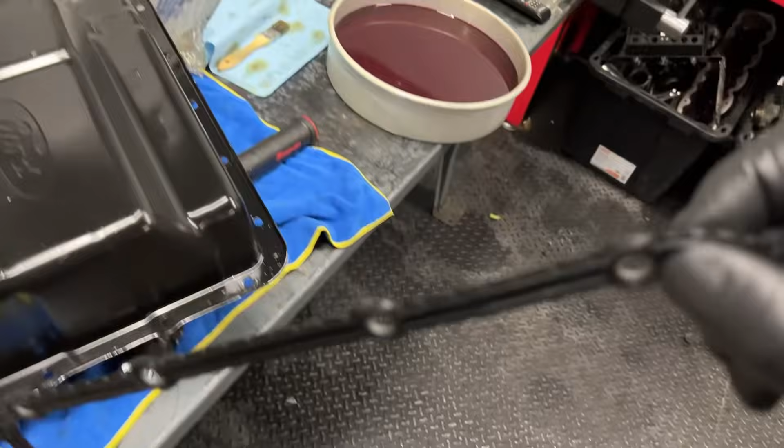I just want to make a note. This is the gasket I prefer to use every time. It's a bonded gasket, like a hard rubber with metal around it. Cork gaskets are crap. I've never had good luck with them. Any transmission. So if you guys can, 68RFE, Allison, whatever transmission you're working on, get this gasket and you'll have 10 times better luck with it not leaking.

So we're just using the stock pan, so we're just going to torque it down to 11 foot-pounds with some blue Loctite on all the bolts, and then that'll be a wrap. And just like that, boys, she's done.

So if you guys have made it this far in the video, huge thank you. I know this is a bear of a video, over an hour long, but we covered a lot. Hope you guys learned something. Hopefully this helps you guys if you're going to do a 5R110 rebuild. This is, again, my second 5R that I've built, and I've rebuilt the one a few times, but hopefully we got a little bit better luck on this one than we did the first one. But mainly, guys, I hope this helped you at least understand what it looks like in here and what you got to do to rebuild it.

There weren't many 5R110 videos on YouTube when I looked, and again, I may be wrong. There are a couple, don't get me wrong, but I just wanted to make one that was fully in-depth to kind of show you guys what it takes. As we progress and we do more of them, I'll do more, maybe like the performance rebuild, things like that.